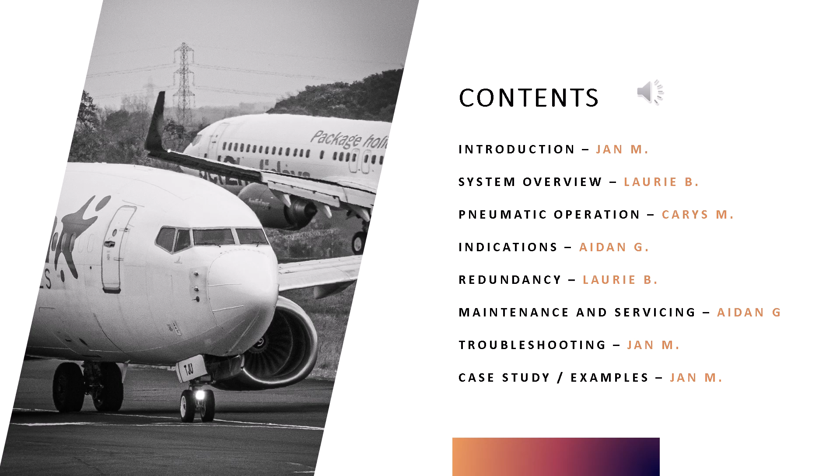Boeing 737-200's pneumatic system supplies compressed air from the engine's 8th and 13th stage compressor bleeds, APU, or a ground cart to a pneumatic manifold. This air is used for air conditioning, cabin pressurization, engine starting, and wing thermal anti-icing.

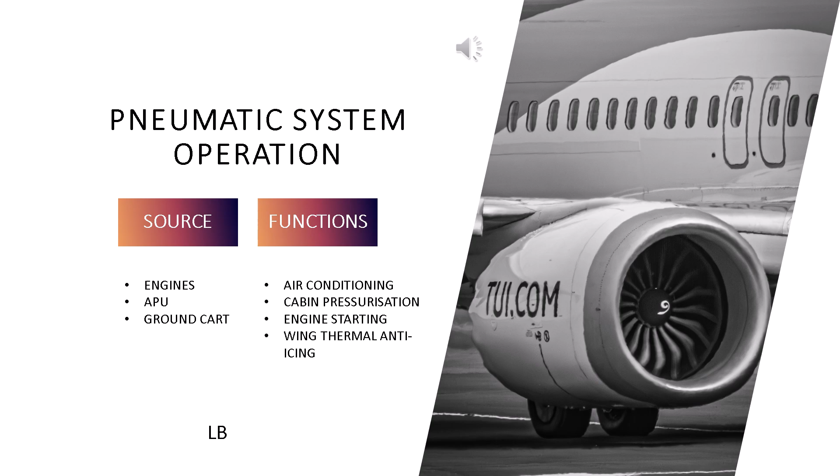The 8th stage bleed is the primary air source, with the 13th stage bleed supplementing when demand increases. Before reaching the manifold, bleed air is cooled by a pre-cooler system using engine fan air.

The system features thermostatically controlled pre-cooler valves and air-to-air heat exchangers, operating automatically when engines are running. Pressure and temperature are monitored via pressure transmitters and over-temperature switches, with readings displayed on the cockpit overhead panel. Over-temperature trip lights activate if bleed air exceeds 490 degrees Fahrenheit, automatically closing the affected engine's bleed valve.

The system also includes an air cleaner subsystem that removes impurities when engine bleed air is used on the ground or with flaps extended.

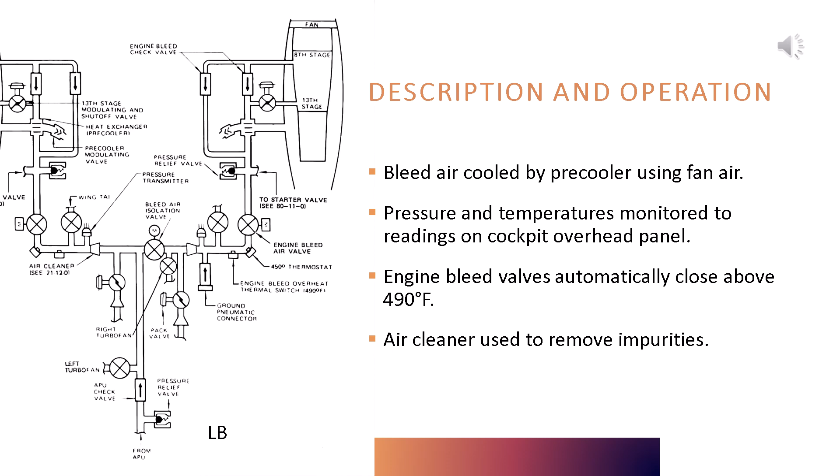First, we'll be looking at the 13th stage modulating and shut-off valve. There's one for each engine and it's located upstream from the pre-cooler.

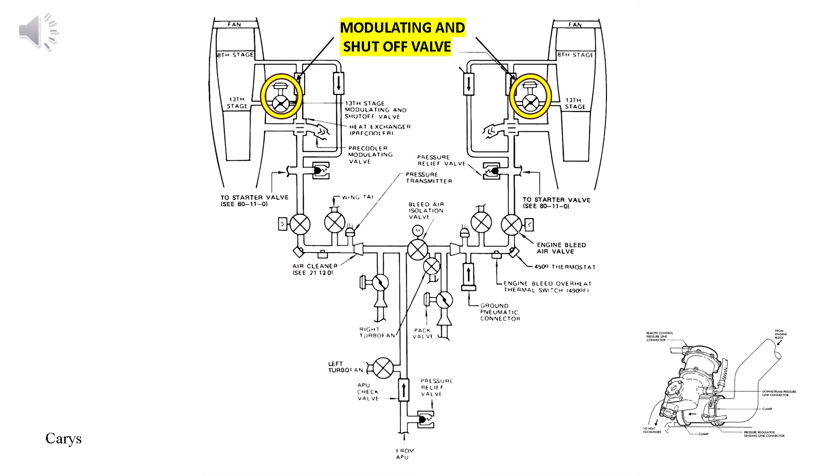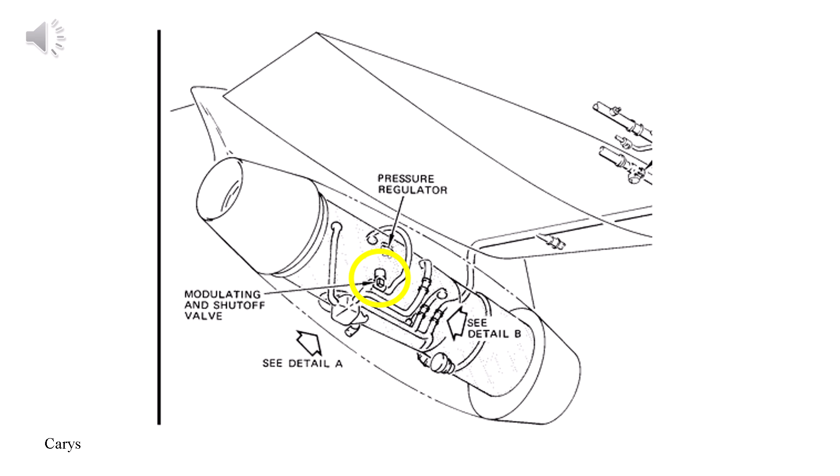See on this diagram where the 13th stage modulating and shut-off valve is located on the engine, circled in yellow. Diagram of the 13th stage modulating and shut-off valve.

The valve is used when the 8th stage bleed air is not enough to meet demands. For example, if both the air conditioning system and the anti-ice system is in operation, then the 13th stage modulating and shut-off valve will need to be used to regulate the flow of the 13th stage bleed air for the system.

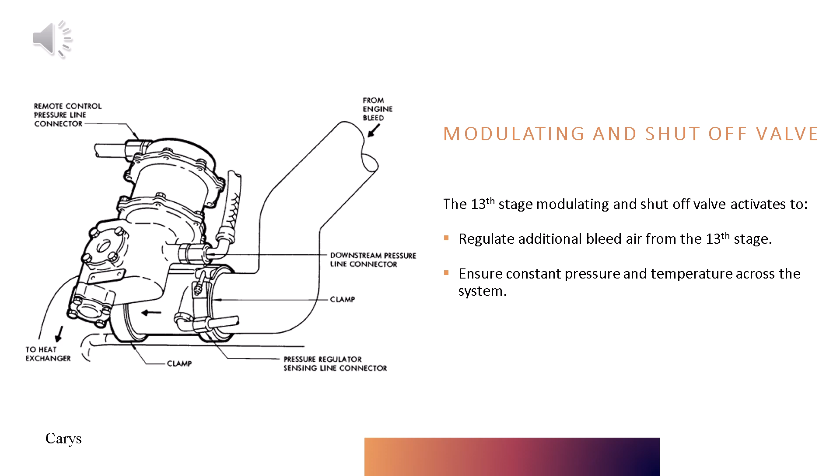You can see in this picture the valve has an actuator that is divided into two pressure chambers. One is an opening chamber that is connected to a pressure regulator, and the other one is a closing chamber which is connected to the pneumatic manifold downstream of the pre-cooler. The diaphragm assembly uses a connecting rod and a linkage to operate the butterfly valve.

In operation, the pressure from the pressure regulator will be supplied into the opening chamber, which is where the pressure on the diaphragm will overcome the spring and move the butterfly valve to the open position, which will allow 13th stage bleed air to flow.

The downstream pressure will be sensed in the closing chamber and will then close the spring, resulting in the butterfly valve closing.

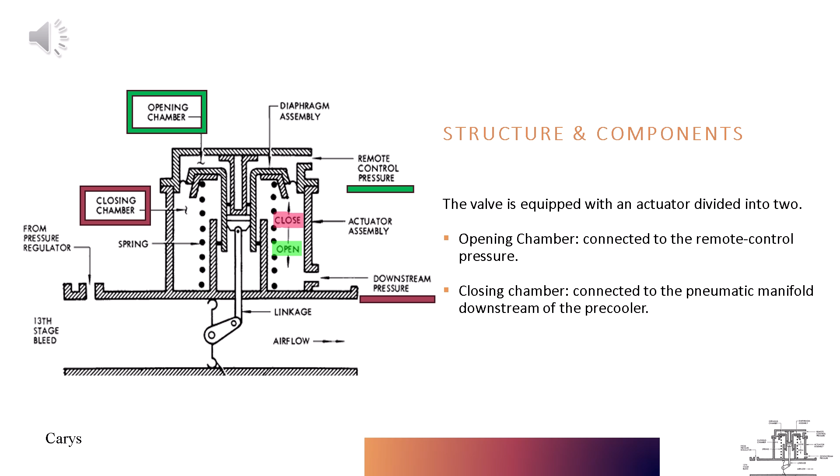Here you can see the opening chamber in green. Here you can see the closing chamber in red.

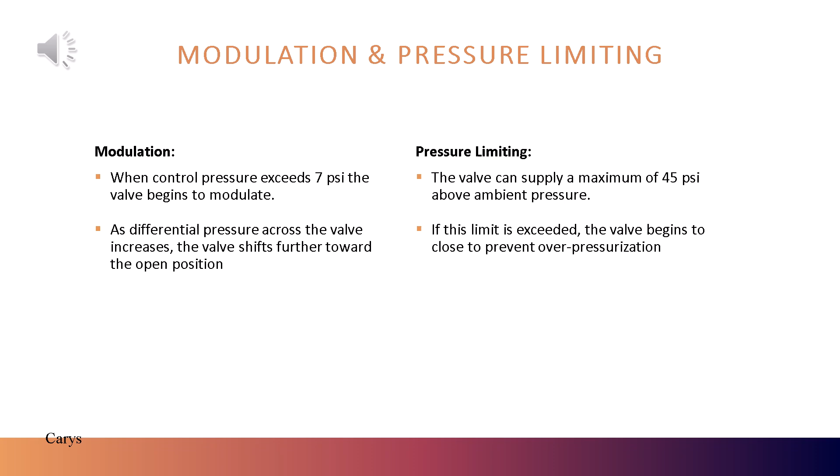When the control pressure exceeds 7 psig, then the 13th stage modulating and shut-off valve will modulate. When there's a differential pressure across the valve, then it will move towards the open position. The maximum pressure that the 13th stage modulating valve can supply is around 45 psig above the ambient. If it exceeds this, then it will start to close.

Next, we'll be looking at check valves. 5 check valves are provided in the engine bleed air distribution system. 2 check valves are provided at each engine, one in each 8th stage manifold to keep the air from entering the 8th stage engine ports during engine start or from high spool bleed.

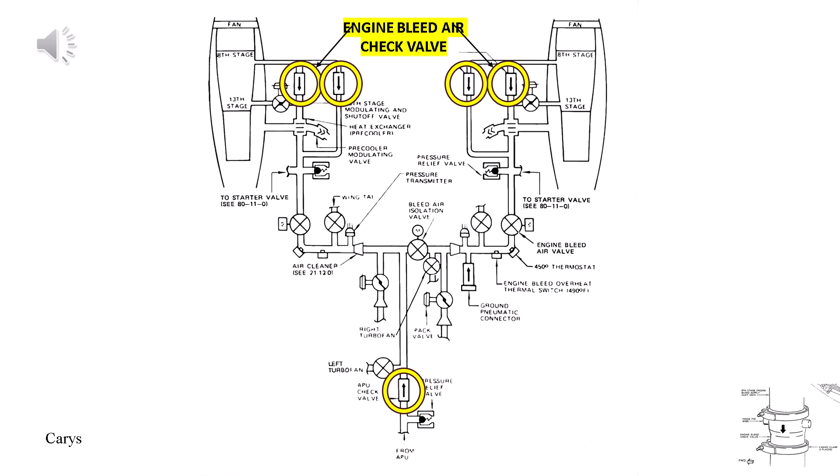The 5th check valve is located in the APU supply duct to prevent engine bleed air from entering the APU. These check valves are highlighted in yellow.

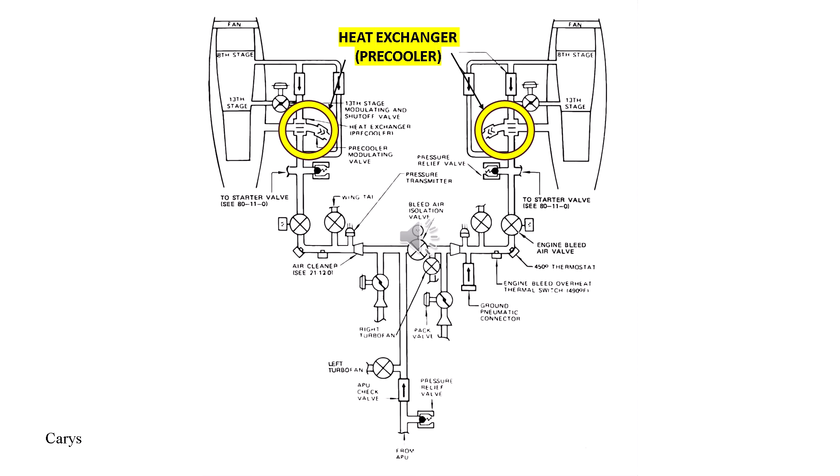We'll be looking at the pre-cooler and the pre-cooler valve. This is shown in yellow on the diagram. There's one pre-cooler and pre-cooler valve for each engine.

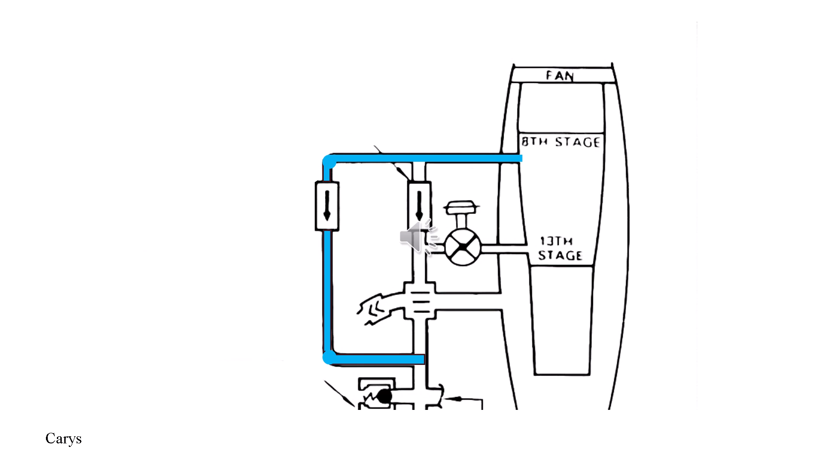As you can see in the diagram, most of the 8th stage bleed air bypasses the pre-cooler. This is so the bleed air pressure doesn't drop too much and is also used for cooling.

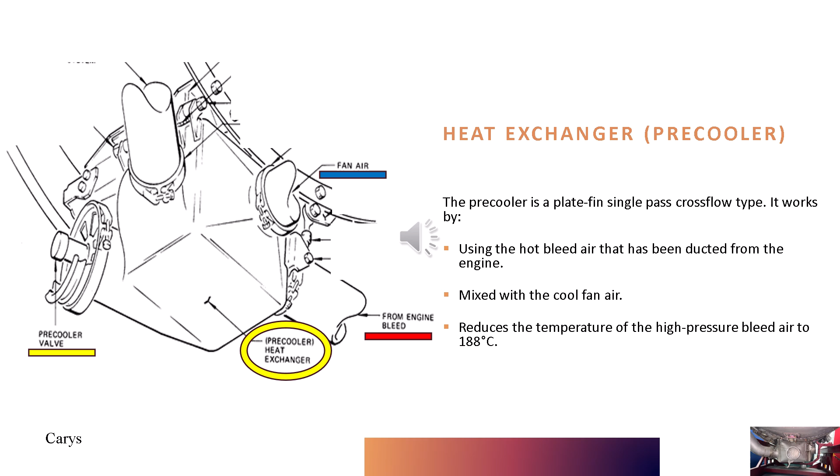As you can see in this image, the pre-cooler is located below the engine. The pre-cooler is a plate-fin single-pass cross-flow type. It works by using the hot bleed air that has been ducted from the engine and is mixed with cool fan air. This reduces the temperature of the high-pressure bleed air to 188 degrees Celsius. The fan air that's been used is ducted overboard.

In yellow is the pre-cooler valve. This valve controls how much cool air flows through the pre-cooler to regulate the temperature of the bleed air.

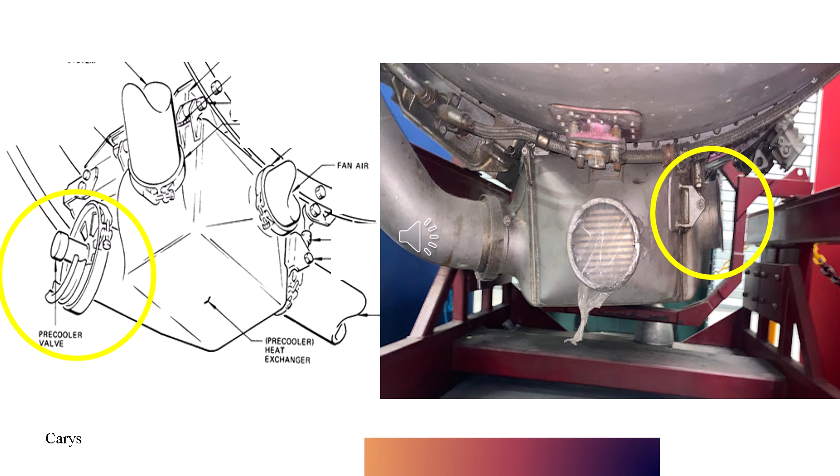This image shows that the valve has a fixed plate and a moving plate. The moving plate has an opening, so at low temperatures the holes can be covered to limit the flow of cooling air, and vice versa at high temperatures.

A bimetallic element, shown in yellow, is used as a temperature sensing element. This controls the moving plate to then control the amount of cool air that's allowed to flow. The valve will be fully closed at 185 degrees Celsius and will be fully open at 226 degrees Celsius. At 254 degrees Celsius, the overheat trip is set to avoid trip outs.

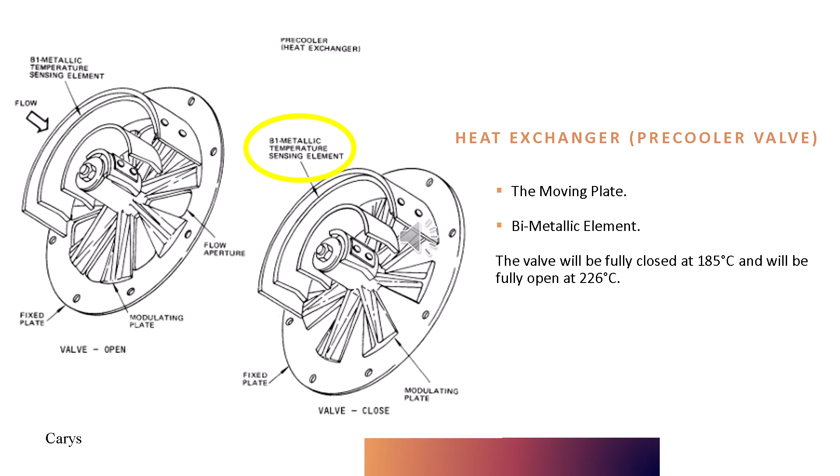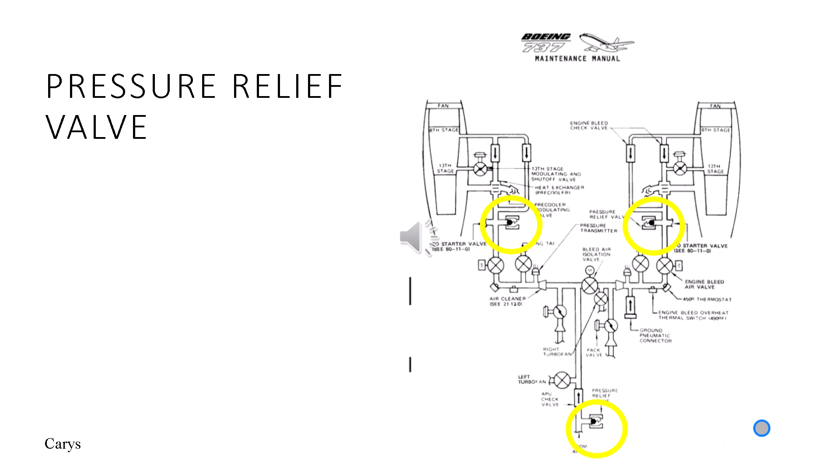Next along on the schematic is the pressure relief valves. These are used to protect the pneumatic system from excess pressure. As you can see highlighted in yellow, there are 3 pressure relief valves in the pneumatic system - one for each engine and a third in the APU section.

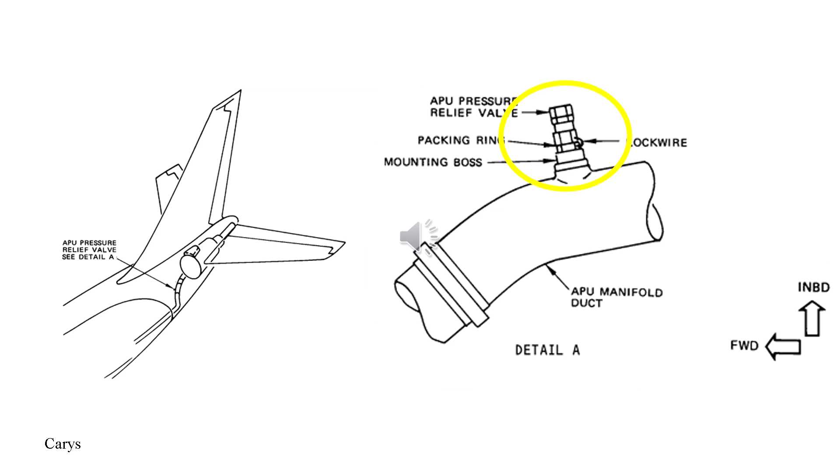Circled in yellow is where the pressure relief valve is located on the APU. The APU pressure relief valve will relieve pressure at around 106 psi.

All 3 pressure relief valves operate automatically and will open when the pressure gets too high. They are spring loaded and set to their specific pressure, so if the pressure is exceeded, that pressure will overcome the spring force and open the valve. When the pressure drops back down, then the valve will close.

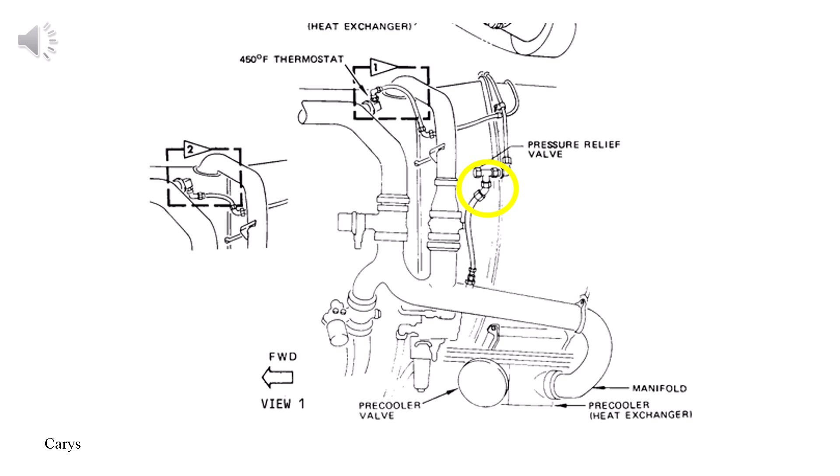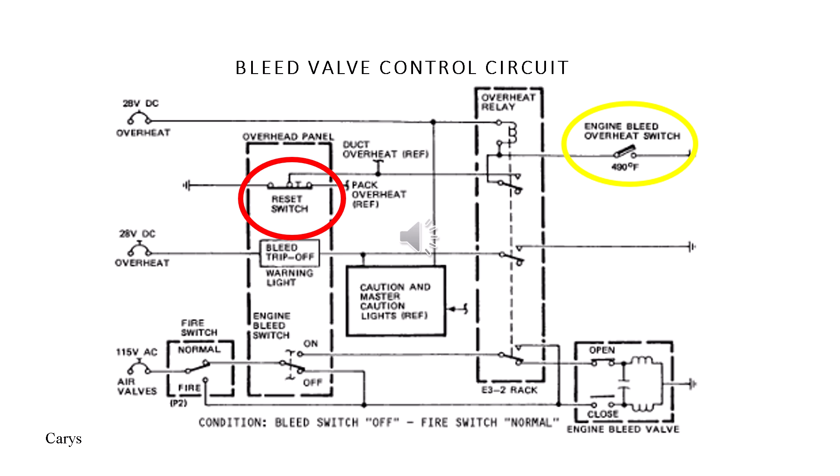A trip reset switch, that's circled in red, can be used to reset the engine bleed air valve on ground if it has been closed.

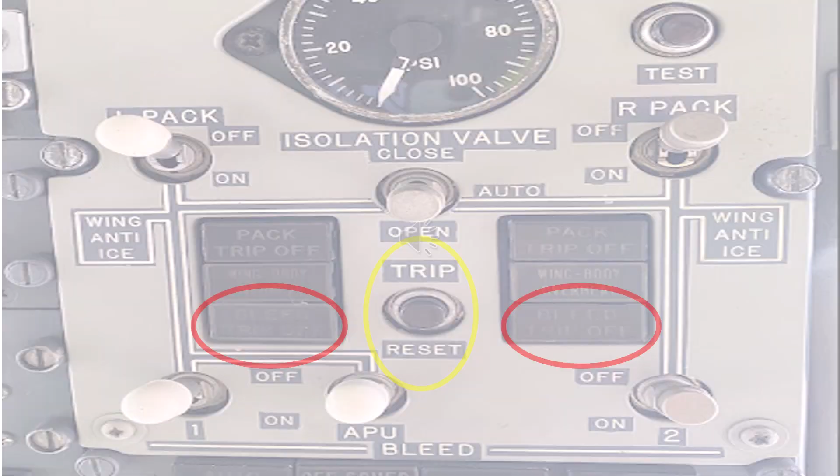You can see a tube that is used to connect the thermostat and the control line from the 13th stage modulating and shut-off valve.

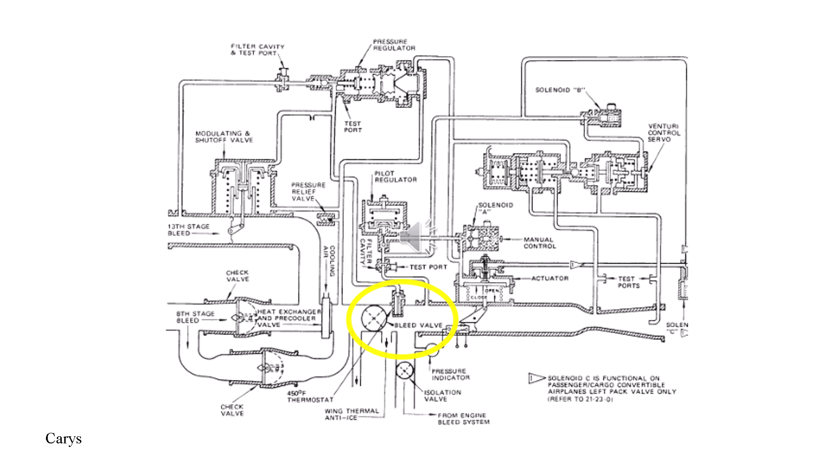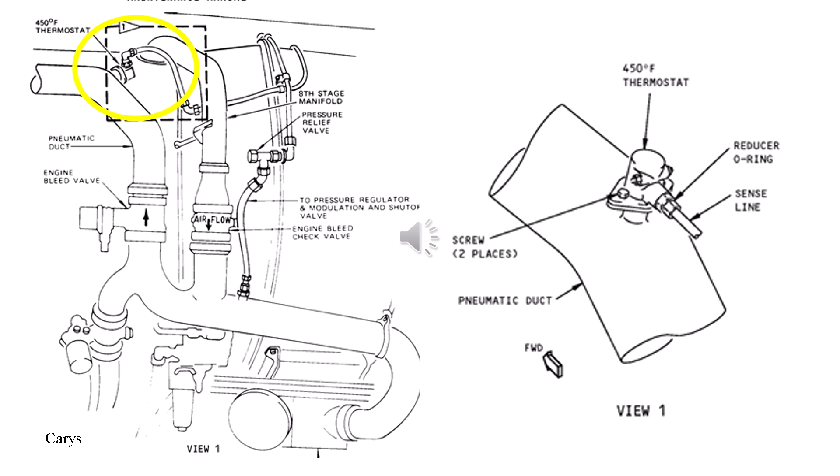When the temperature over 450 degrees Fahrenheit is sensed, it will bleed off the control pressure in the sense line to the 13th stage modulating and shut-off valve and the 13th stage pressure regulator. As the control pressure reduces when an exceeding temperature is sensed, it will result in the 13th stage modulating and shut-off valve moving towards the closed position, which then reduces the amount of bleed air through the pre-cooler.

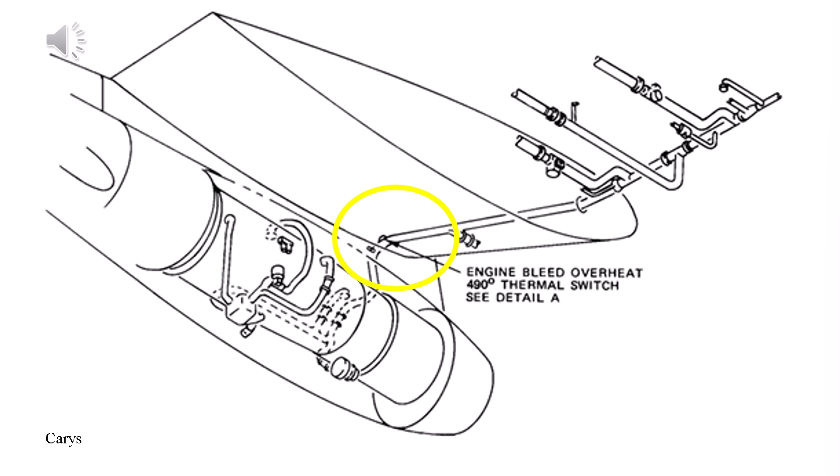In this slide you can see the engine bleed overheat thermal switch highlighted in yellow, and where it's located along the ducting on the leading edge of the wing.

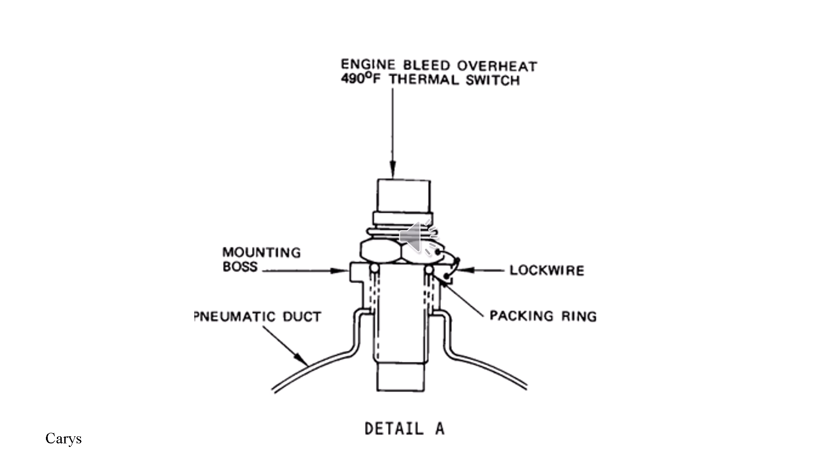Here is a close-up of the engine bleed overheat thermal switch. It uses a bimetallic strip to detect the temperature. If the temperature detected exceeds 490 degrees Fahrenheit, plus or minus 10 degrees, for more than 15 seconds, the bleed valve will close. This protects the system from hot, overheated air.

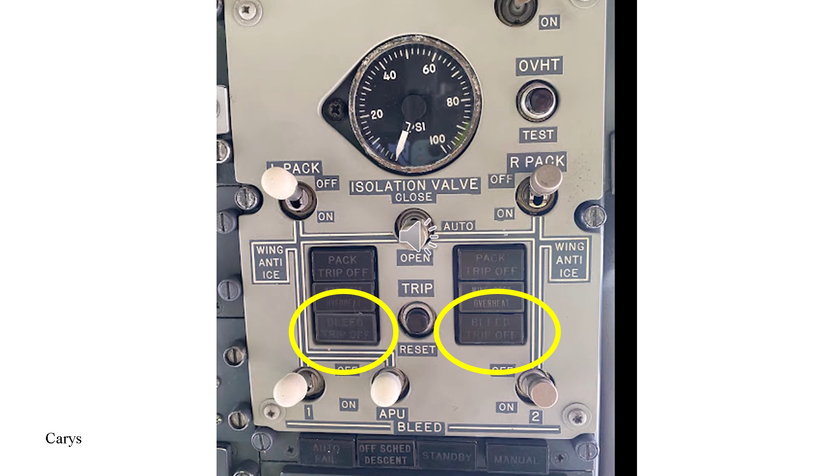Here's another picture of the forward overhead panel. When the bleed valve is closed, it will illuminate the bleed trip-off lights that were mentioned earlier, but here they're highlighted in yellow again. The light can be reset, but the air temperature in the ducts will have to have cooled down by around 20 to 30 degrees Fahrenheit.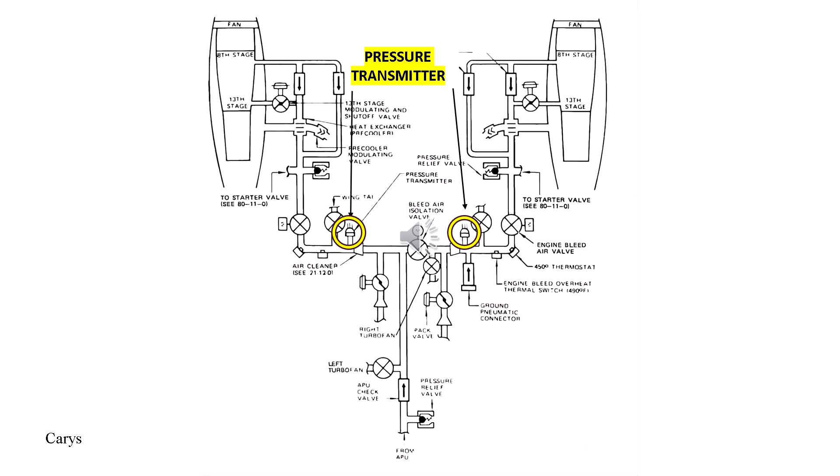The next component is the pressure transmitter, highlighted in yellow. There's one pressure transmitter for each engine, and they're located downstream of the engine bleed thermal switch on the outboard side of the forward air conditioning equipment bay.

In this diagram you can see the pressure transmitter in the air conditioning equipment bay. Here you can see the pressure transmitter, which provides a pressure indication of the bleed air.

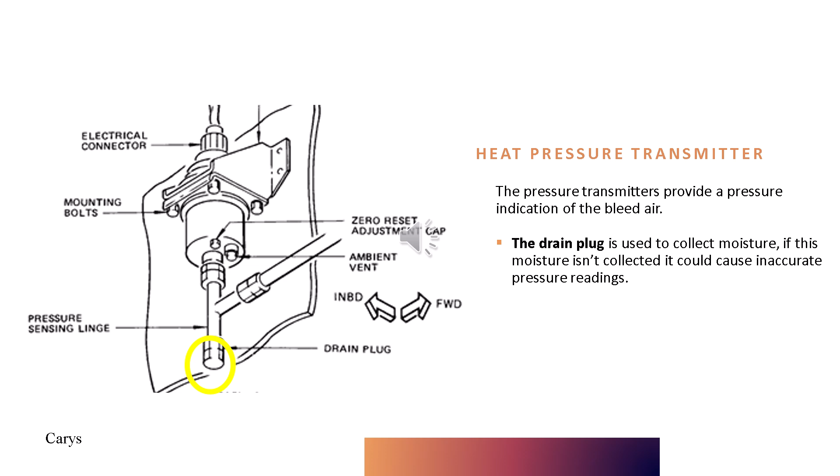Circled in yellow is a drain plug. The drain plug on the bottom of the pressure transmitter is used to collect moisture. If this moisture isn't collected, it could cause inaccurate pressure readings, or if the moisture freezes, it could cause the tubing to split.

Next along is the ground pneumatic connector, shown in yellow. There's one ground pneumatic connector, located on the right pack bay area on the underside of the fuselage. You can also see on the diagram a check valve to eliminate any reverse air.

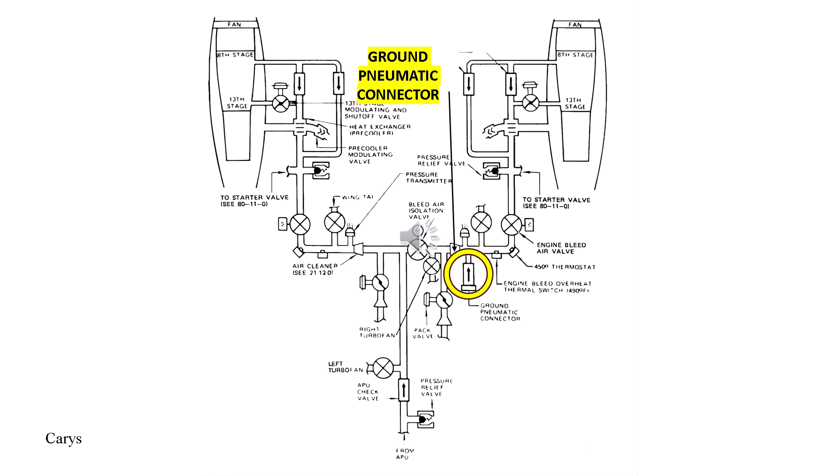This pressurised air can be used for starting, as well as for the air conditioning system when the engines are not running on the ground, although AC power will need to be available to do this. The maximum pressure for the ground pneumatic connector is 60 psig, and the maximum temperature is 450 degrees Fahrenheit.

Downstream of the pressure transmitter is the air cleaner system, highlighted in yellow. There's one independent subsystem for each engine, used to purge the engine bleed air of any impurities. It operates automatically when engine bleed air is used for air conditioning and the aircraft is on the ground, or when flaps are extended.

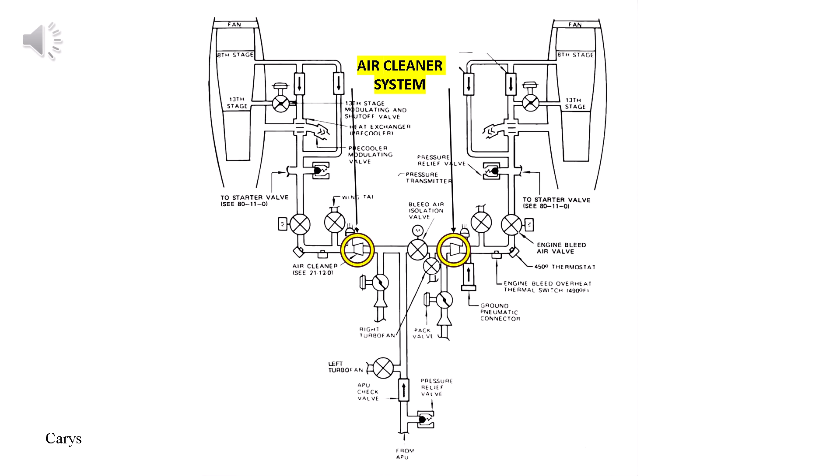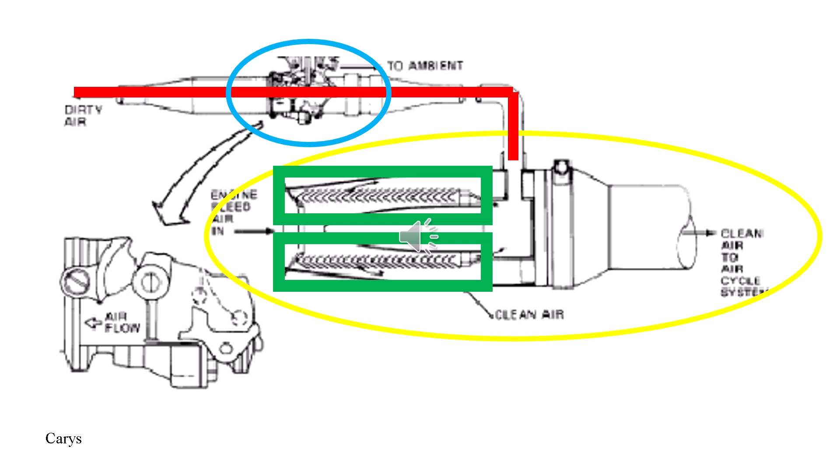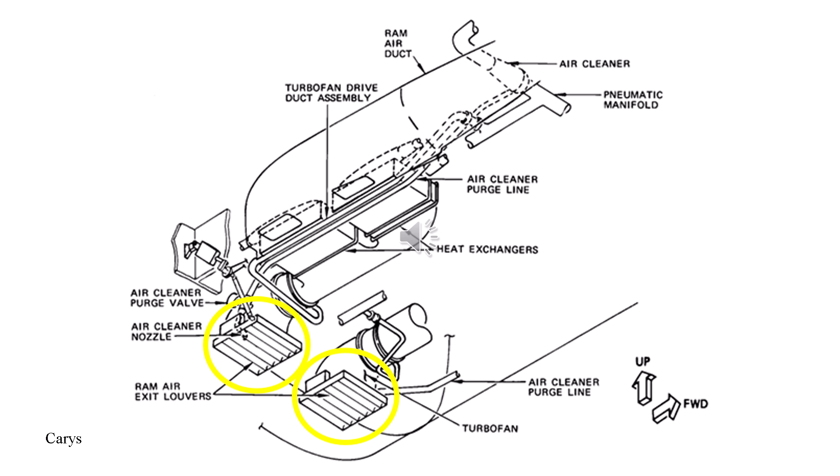The air cleaner system works when air leaves the pre-cooler and is ducted into the centre of the air cleaner, passing the louvered vanes to collect impurities, then to the downstream end where heavier particles are collected in a collector ring. This collector ring is connected by the purge air duct through the purge valve, which then goes into the ram air exhaust duct, highlighted in yellow. An air cleaner nozzle connected to the ram air exhaust duct is used to limit the amount of air vented overboard.

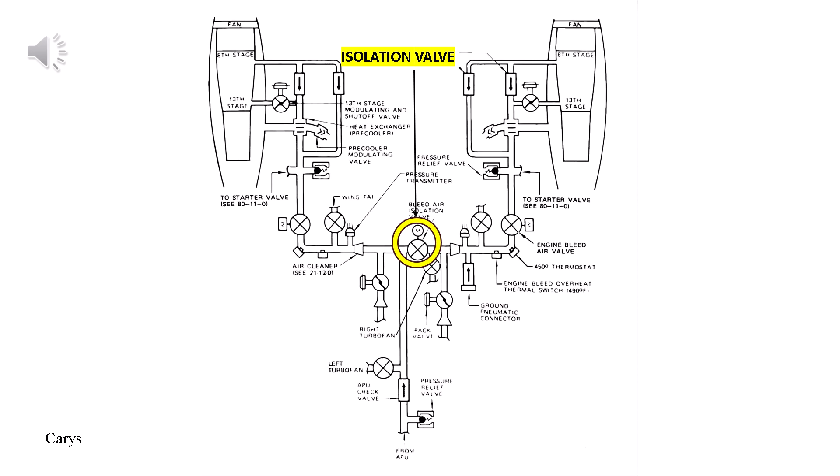Next is the isolation valve, highlighted in yellow. It's located inside the keel beam with lightening holes for access. There's only one, which will isolate the systems. The isolation valve separates air from the number 2 engine and the number 1 engine, unless a crossfeed of bleed air is needed.

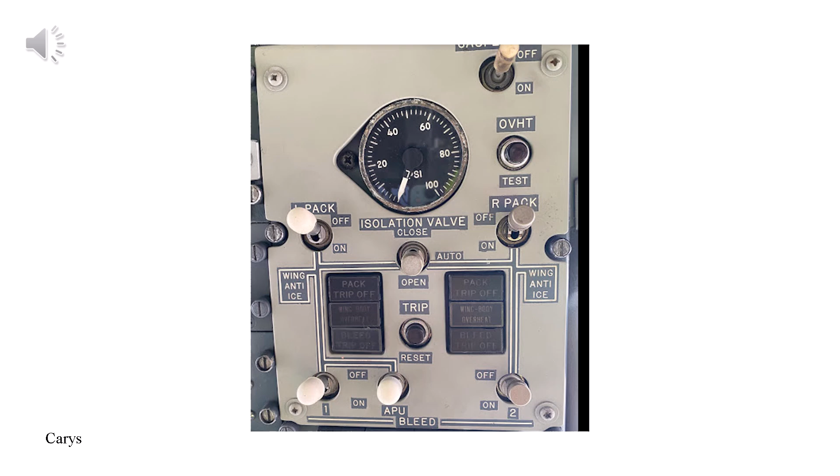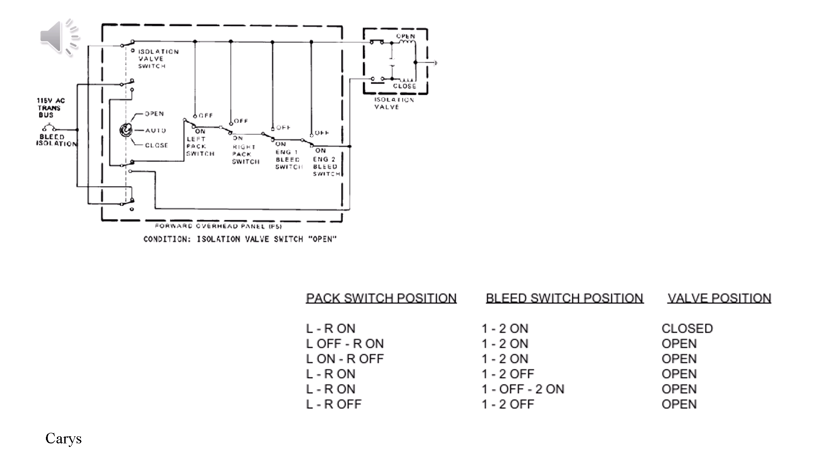When the isolation valve is in automatic mode, it will be closed as long as both engine bleed switches and both of the pack switches are selected to on. On the left you can see the switch diagram showing the switch positions for the isolation valve, and on the right is a table showing other combinations of switch positions where the isolation valve will be in the open position. In the event of an engine shutdown or overheat trip, the system will automatically allow the remaining air source to supply both sides of the aircraft.

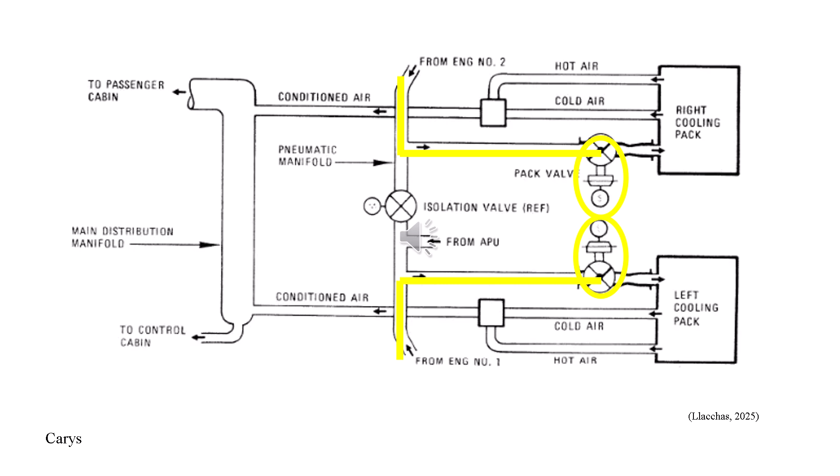Next we'll be looking at the pack valve, aka the PRSOV. There's one for each air conditioning system, circled in yellow. The pack valve is located in the air conditioning pack and is used to initiate airflow to each air conditioning system. It also regulates the airflow in cubic feet per minute, so a pretty constant flow is supplied to each air conditioning pack. As highlighted in the diagram, pre-cooled air from engine number 1 and 2 flows through the ducts, and before the isolation valve it takes a right into the pack valve. The air will then flow through the air conditioning after that.

Here is a diagram of a pack valve with the actual valve circled in yellow. The pack valve consists of a butterfly valve, upstream venturi, pneumatic actuator and pneumatic controls. It's pneumatically driven and electrically controlled with a solenoid override for the APU operation.

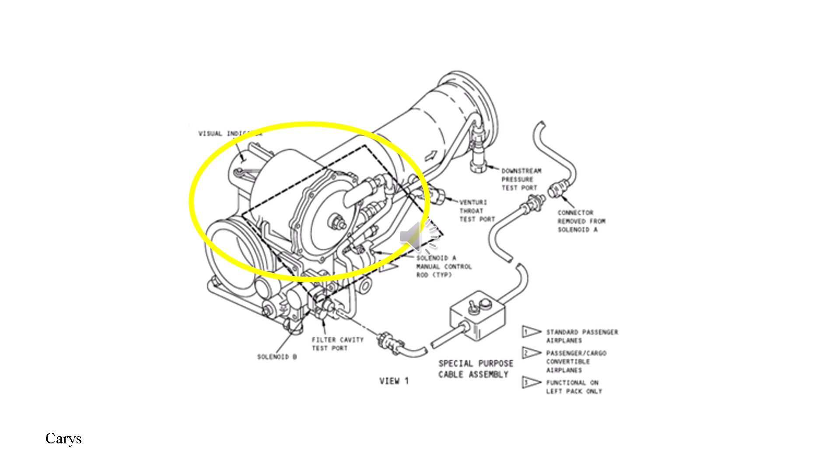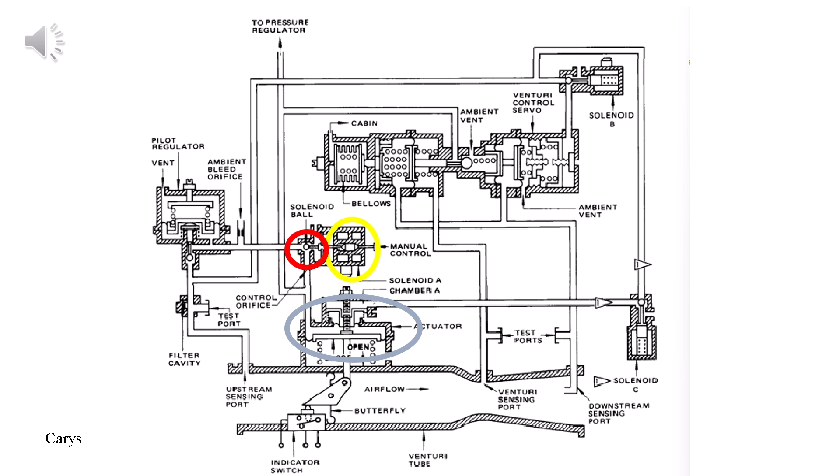To close the butterfly valve, solenoid A, highlighted in yellow, will get de-energised and will need to seat the solenoid ball on the inlet port, highlighted in red. This will close off the actuator supply and vent it. The actuator spring, shown in blue, will then move the butterfly valve to the closed position.

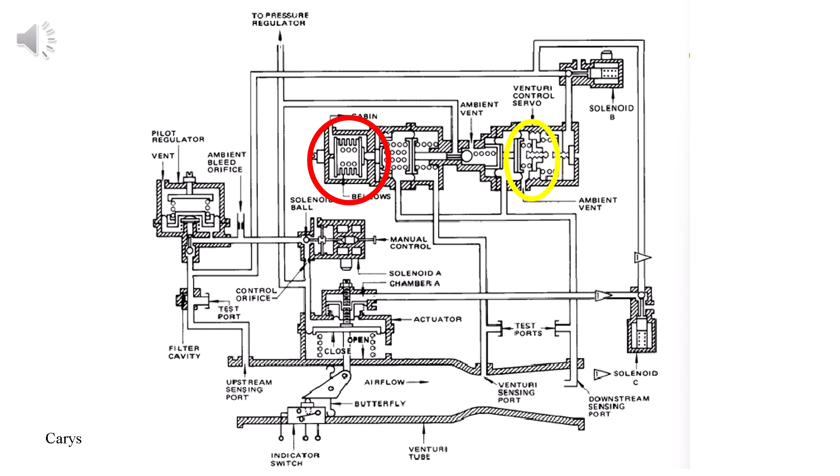When the airflow increases, the Venturi control servo, shown in yellow, bleeds off air through the bore valve to maintain the actuator pressure and maintain the flow. If the cabin pressure decreases, the bellows, shown in red, will expand and change the Venturi control servo spring balance, which will produce a low airflow rate. If there's electrical power loss, the valve will open and will regulate at a constant pressure.

Here you can see the switches on the forward overhead panel that control the pack valves. They're marked left pack and right pack.

On newer Boeing 737-200 models, the pneumatic ducts have gold paint or tape installation added onto air conditioning ducts located in the underwing left and right hand pack bays. When the aircraft is on the ground in hot weather, it is very likely the air conditioning pack will be in operation using the APU bleed air. The gold paint or tape helps reduce radiation and reduces the chance of possible overheat warnings that may occur.

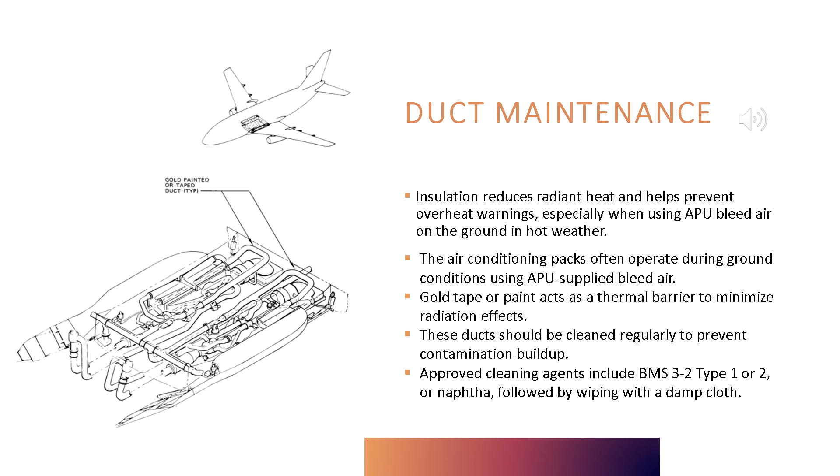These taped and painted ducts should be cleaned periodically to prevent a build-up of contaminants. The tape or paint should be cleaned with BMS 3-2 type 1 or 2 or naphtha, which are types of mineral and crude oils. They should then be wiped with a damp cloth. At normal temperatures, fire-resistant hydraulic fluid is safe with titanium.

But if the temperature goes above 170 degrees Fahrenheit, which is 76 degrees Celsius, the fluid turns acidic and starts to corrode the titanium, making it brittle.

Titanium ducts are mainly found in three places: the air conditioning equipment bay, the wing leading edge TAI system or the anti-ice system, and the pneumatic system just after the APU check valve. If we think any titanium ducts got contaminated with hydraulic fluid, we need to inspect them.

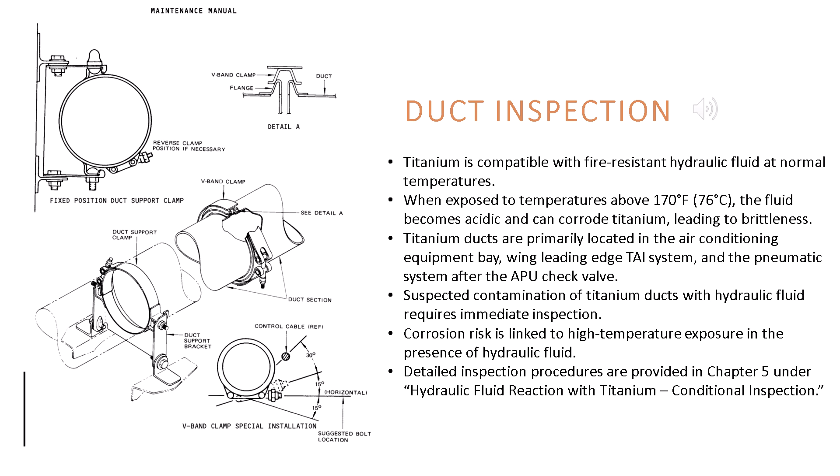Further information is found in Chapter 5 under Hydraulic Fluid Reaction with Titanium, Conditional Inspection. In the event of the insulation surrounding the pneumatic duct system suffering damage, it must be repaired. The maintenance manual conveniently includes the materials required for the repair.

The following instructions have been provided in the Boeing 737-200's maintenance manual in Chapter 36.11.02. The area that requires repair must be cleaned using a clean cloth soaked in a mild detergent diluted in water. The area cleaned should then be rinsed with a second cloth soaked only in clean water and wiped dry.

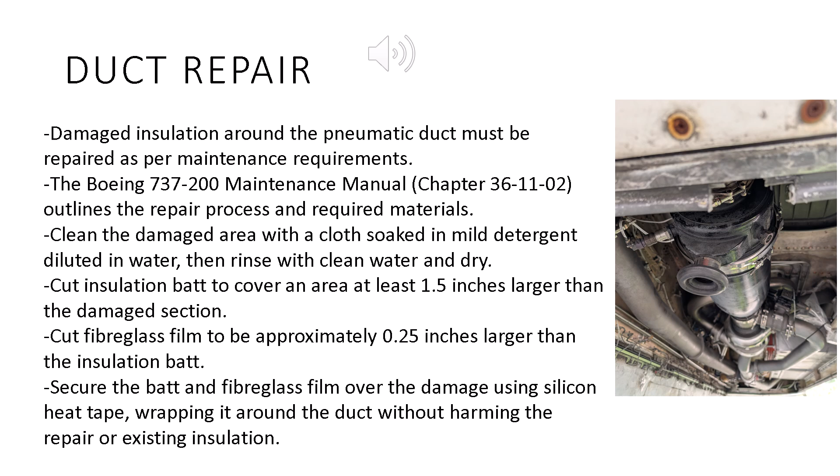The insulation batt should be cut to an area that is at least 1.5 inches over the damaged area. The fiberglass film should be cut to a size approximately 0.25 inches larger than the insulation batt. Secure the insulation batt covered by the fiberglass film over the damaged area with silicone heat tape. The tape should then be applied around the duct, avoiding damaging both the repair and existing insulation.

Thin-walled ducts can get damaged easily from bad handling, installation mistakes, or extreme operating conditions. Sometimes it's better to replace the whole duct instead of trying to patch it up, especially if pressure or temperature issues are involved. If there's a smooth dent that doesn't block airflow, you don't need to fix it.

But for deeper smooth dents, you can remove them by pulling a ball mandrel through the dent, using a mechanical or hydraulic expander, or applying hydrostatic pressure while gently tapping around the dent with a non-metallic hammer.

If you see shallow scratches, gouges, or corrosion less than 10% of the duct wall thickness and the damage is smooth and rounded, no rework is needed. For sharper damage, you can clean it up by removing nearby metal, but only if you follow these rules.

The wall must stay at least 90% as thick as it originally was. Surface finish after rework should be 40 RMS or smoother. The slope should not be steeper than 1 to 10. Reworked curves must have a radius of at least 0.12 inches. If the damage is close to a welded joint, within 0.25 inches, special rules apply.

If you can't repair the ducts within these limits, it has to be replaced. For badly damaged ducts, refer to the overhaul manual.

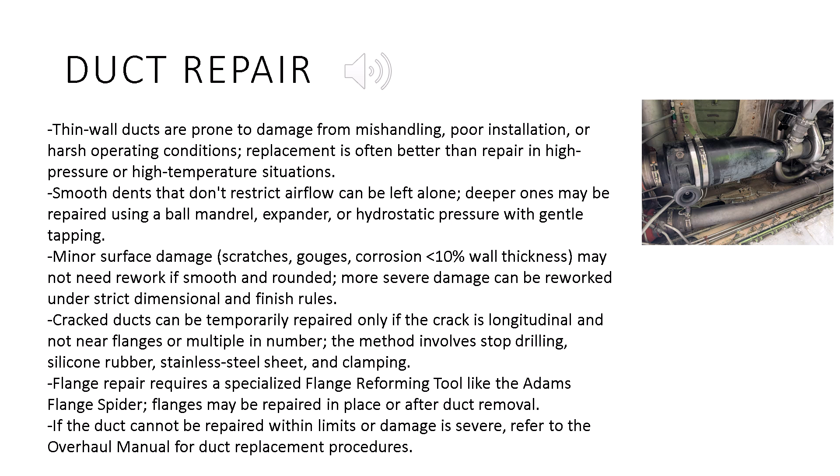To repair the flange, you must get access to the damaged flange, use the flange reforming tool to reshape it, and if you can't repair the flange while it's still installed, you'll need to remove the duct first. Once removed, use the reforming tool to complete the repair.

The duct ball joints are found in the engine sections of engine 1 and 2. They connect the 8th and 13th stage bleed manifolds to the engine bleed air and thermal anti-ice system ducts. Each ball joint has an inner bearing and a bearing nut attached to one duct, a retainer attached to the other duct, a replaceable wear ring, which can be split or solid, and adjustment shims.

Maintenance on the ball joints includes removing and installing the wear ring with proper adjustment, doing a ball joint leakage test, and carrying out approved repairs if needed.

If you find excessive leakage at the ball joint, you can fix it by doing these steps. To repair the ball joint, first remove the wear ring, check for any burrs or interference on the wear ring, the threads, or the shims, and clean them up. Rework the wear ring, or if needed, replace it with an oversized wear ring to close up the end gap.

When working with the wear ring, spring it in the gap until you get a 1-inch overlap, then let go. Do this a few times until the ring naturally sits together at the split. Reinstall the wear ring carefully. Start at the split and peel it onto the duct to avoid spreading it too wide. Finally, install the wear ring following the standard installation steps.

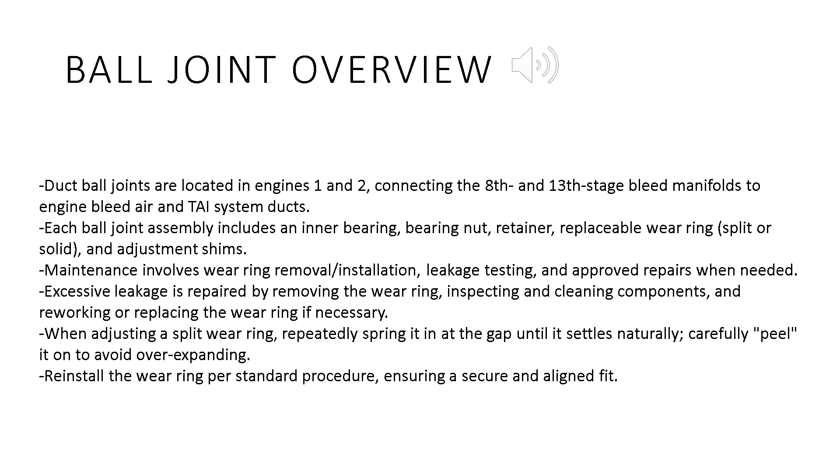This system is composed of transmitters which work together to monitor bleed air pressure. Each transmitter is routed to the pneumatic manifold, just downstream of the bleed air heat exchanger. Both transmitters are electrically connected to a dual pressure indicator located on the overhead panel. One transmitter senses engine number 1 bleed air pressure, while the other senses number 2 bleed pressure.

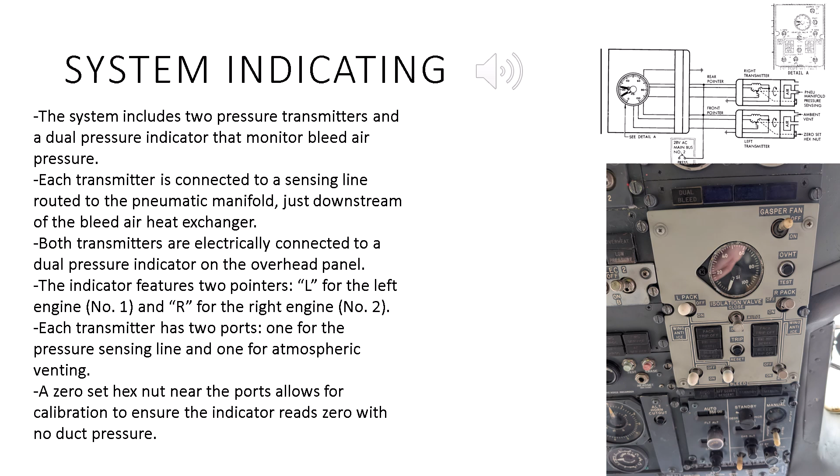Each pressure transmitter features 2 ports. One connects to the pressure sensing line, the other is a vent to atmosphere. Located near these ports is a zero set hex nut. This nut is used to zero the indicator when there is no pressure in the ducts.

During normal operation, the number 1 engine supplies the left air conditioning system and the number 2 engine supplies the right. The reason systems are separated is for redundancy. The isolation valve allows cross-feed capability should bleed air not be available from one engine. Opening the isolation valve enables the functioning engine to supply bleed air to both sides, allowing continuous operation for essential systems, even if one engine bleed source is lost.

The isolation valve can be operated manually or left in automatic mode. Engine bleed valves and the isolation valve feature manual override controls.

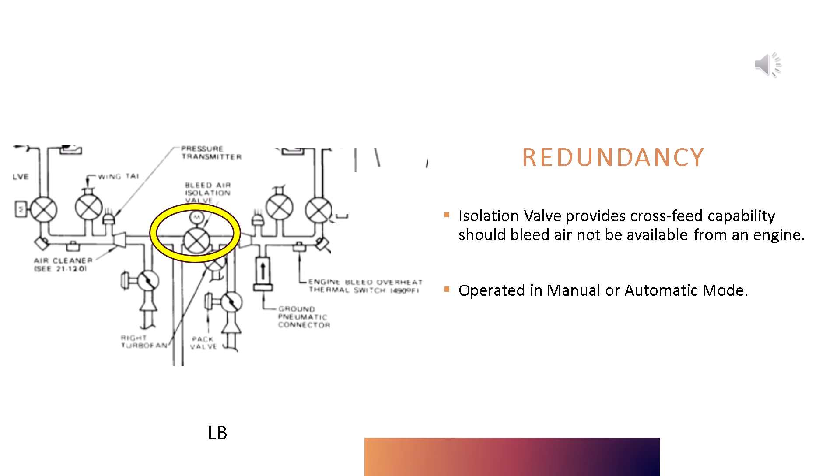Bleed air from the 8th stage reaches the main manifold via 2 separate ducts. One duct goes through the pre-cooler heat exchanger. The second duct bypasses the heat exchanger and delivers additional air directly to the manifold. Two separate ducts ensure that if the pre-cooler path is compromised or restricted, bleed air can still be delivered via the bypass duct, maintaining system functionality.

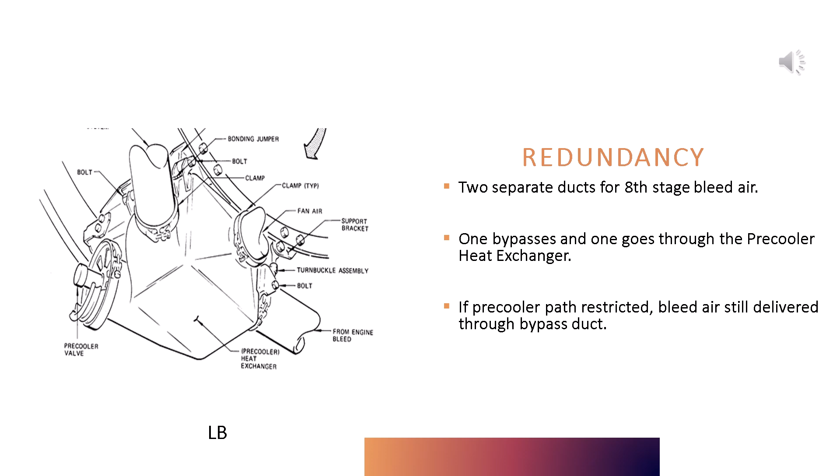The APU also acts as a redundancy in flight by providing bleed air. During flight, APU operation has limits. It is limited to 2 starts per hour. Up to 10,000 feet it can be used to supply pneumatics and electrics. From 10,000 to 17,000 feet it is pneumatics or electrics. It cannot be used to supply pneumatics after 17,000 feet.

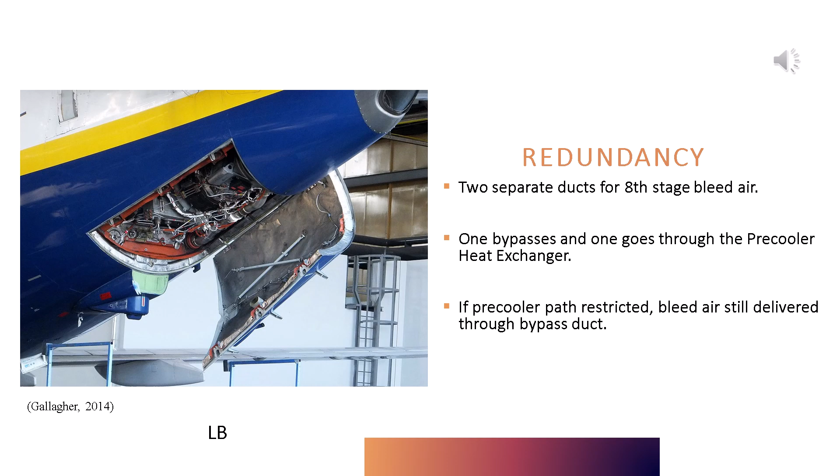Prior to accomplishing troubleshooting on the distribution system, perform the engine bleed air compressor system adjustment test. Troubleshooting as necessary includes closing the circuit breakers. Reference Chapter 21.11.00.

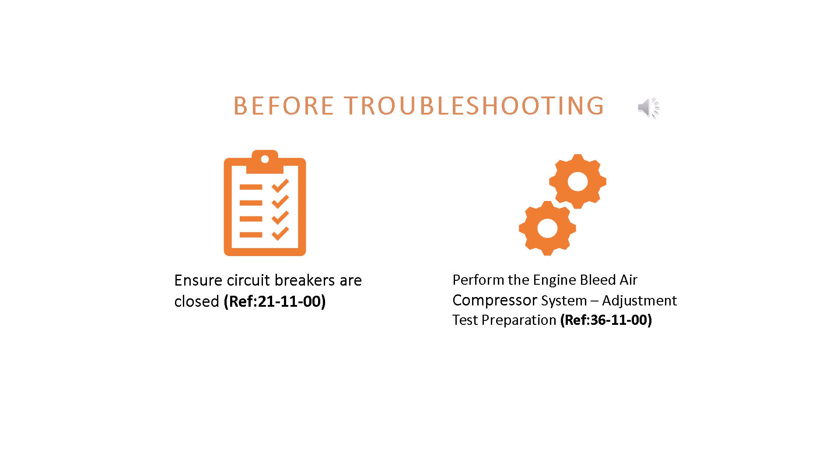After following the preparation test, perform the engine bleed air distribution system test. Reference Chapter 36.11.00 to isolate problems in the system. Then perform the procedures on the following troubleshoot chart to isolate system and component faults.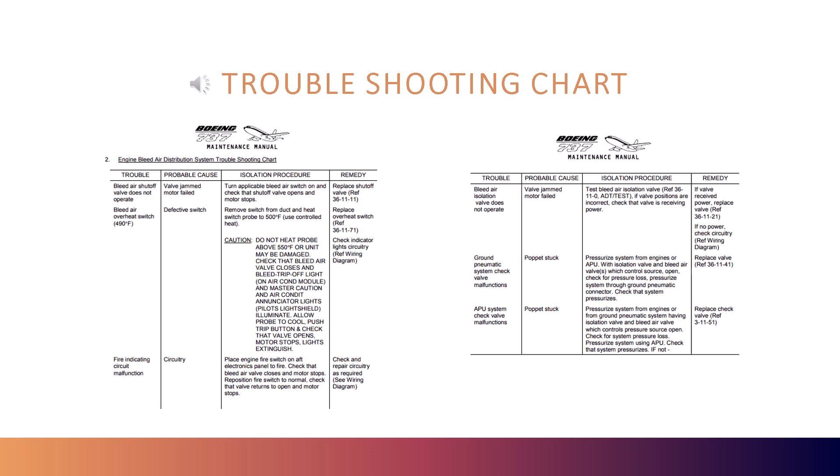In this slide, issues include check valve, faulty isolation or shut-off valve, and malfunctioning limit switch affecting indication systems. All checks follow AMM reference procedures.

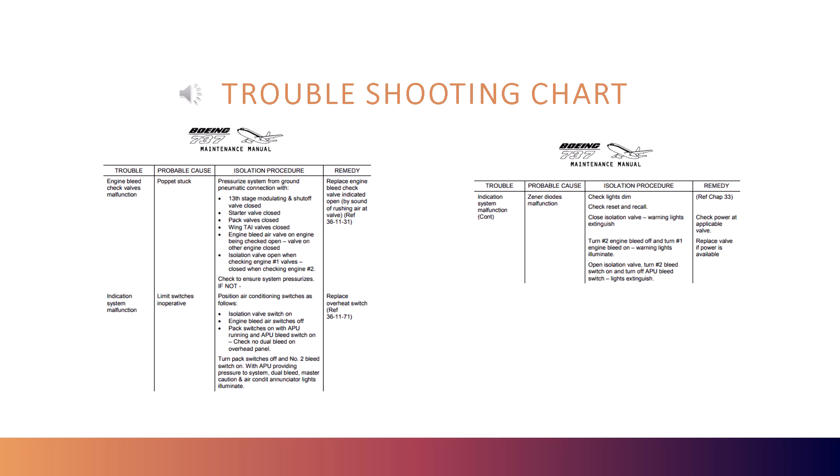Engine bleed air pre-cooler leakage has been eliminated as a possible fault since any leak at the pre-cooler great enough to cause system problems should be obvious. Leakage from ducts may be determined by accomplishing the duct leakage test shown in Chapter 36.11 Adjustment/Test.

All troubleshooting procedures are based on the assumption that wiring is okay and that electrical power is available. If the corrective action in the procedure does not correct the problem, check wiring using the wiring diagram. Prior to troubleshooting, check the master dim and test circuit to ensure panel lights are operable.